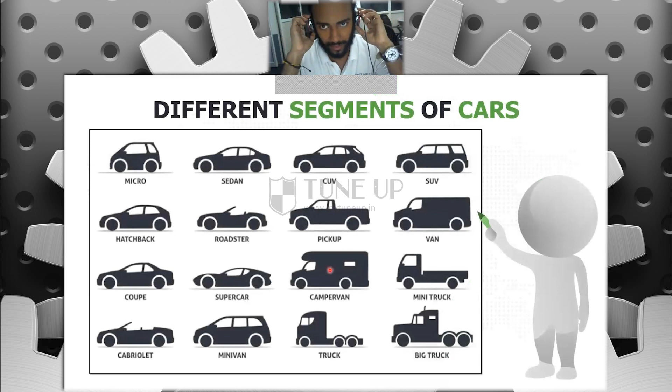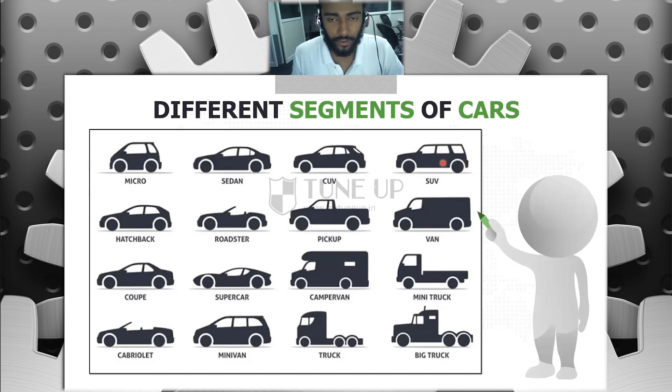Now let us move on to the next one. Now there are different segments of cars, isn't it? You can have a look at the screen now - we have micro, sedan, CUV, SUV. What is CUV? Can anyone tell? It is crossover utility vehicle - correct, somebody typed Akshay. Basically it's a crossover between your SUV and a hatchback - you can notice the design here, and in some terms it depends on other models, sometimes SUV and coupe also they'll do. It depends, so it's nothing but a crossover. You can notice how it's different here. Now we have roadster, pickup, van - these are the different segments of cars. There's a supercar, a coupe, a camper van, mini truck, minivan, cabriolet, then truck, big truck. There are a lot more other segments as well, so this is a general segment of cars. Each particular segment would depend on the requirement - depending on the customer requirement and what kind of purpose it serves. Got it? Okay let us move on now.

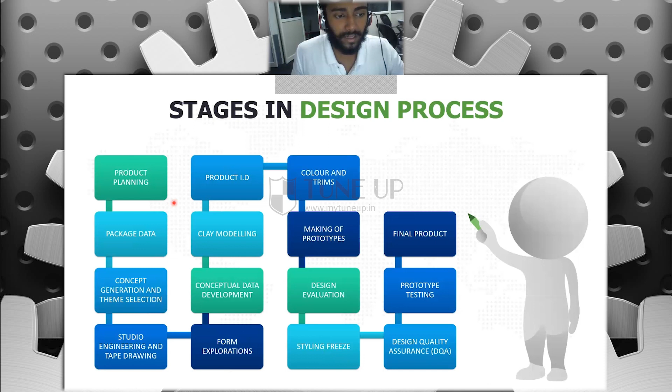Now we have stages in the design process. Let's see the different stages - we could start from product planning, then package data, concept generation and theme selection, studio engineering and tape drawing, then forms exploration, conceptual data - all these things we'll be covering. Today we'll cover half of it, tomorrow we'll go with the rest. Tomorrow I'll also give you a demo about various softwares used in the industry, show you the interfaces and some models, so you get a very good idea about it.

Now what is product planning and brief? This is the specific job of your R&D department, carried out by a multidisciplinary team - not just design engineers. There'll be market analysts, sometimes the CEO, the vendors, the clients, procurement, people from the floor shop - all consulted. There'll be team leaders for each - someone who's team leader of the floor shop, someone who's team leader of the vendors, someone who's team leader of the design engineers. All these people are responsible to establish the parameters and decision points for any product.

If it's a new product, it is called an invention. But usually in the market right now, what is going on is reverse engineering.

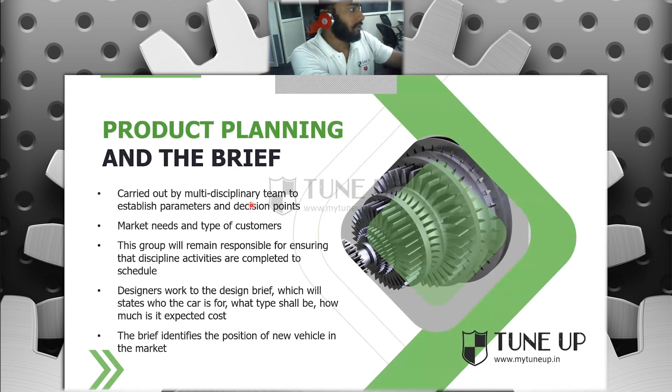So what is reverse engineering? Can someone give me a small definition? It's a very important concept - you can Google it up, I don't mind. The main intention of this workshop is that you should learn something and upskill yourself in your own career. Can someone type? If it's wrong, it's okay.

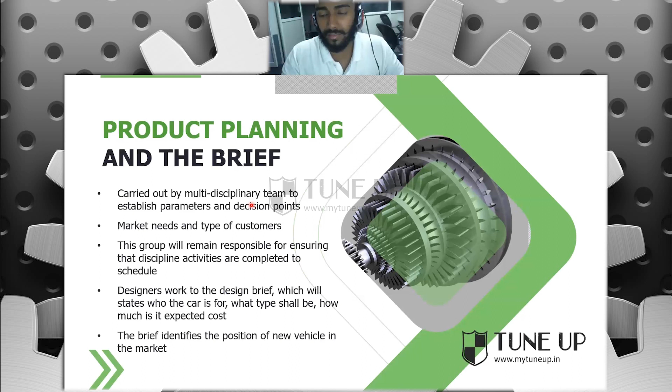Taking the ideal product and rebuilding it from scratch - okay, but why would I rebuild the same product again? Let me give a brief about it. Reverse engineering is when you take a product - let's take a simple mobile phone. There are millions of different types of mobile phones, but the purpose ultimately is the same - calling, internet, apps, and other computing functions. The main purpose is the same, but why are there so many of them? That is what you take in reverse engineering. You might have seen some Chinese brands copy the functions from some US brands, or some Indian brands also copy. So it's like everything is reverse engineering - in the market right now, inventions are very less.

So if some brand or company invents a new technology, everybody else starts copying it. What you do is take a product, break it apart, take its components, and change it a little bit so that you're not called a copycat. That's all, but ultimately you are. Either you come up with a new invention from that, or you improvise it. It's a topic people don't want to be blamed for.

Some companies say, no, I've not copied. Sometimes there are wars between Apple and Xiaomi, or between Indian brands and foreign brands like Samsung and Apple. They'll say we have patented it, but still you have copied that. So all these things happen in the industry, and these are all huge corporations I'm talking about.

But on a local level, you know what China products are, right? So it actually means the R&D process. Yeah, it comes under R&D - reverse engineering. It's a very important term in R&D.

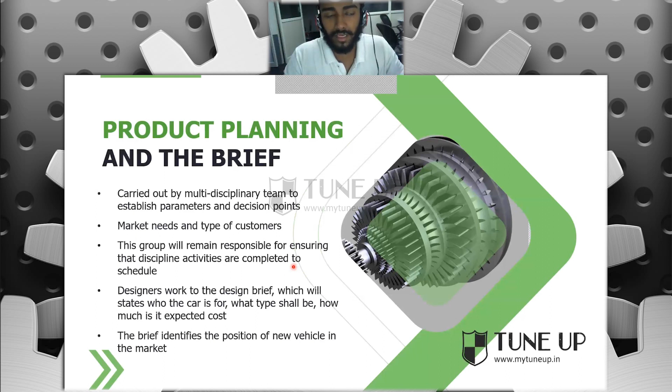If I'm making this car for people who are into sports, the design would change. If I'm making it for families, it would change. If I'm making it for luxury, it would change. If I'm making it for a limousine, for parties and celebrities, it would change depending on that. So I would make the design based on market research, customer need, and all these factors. That comes in the first step.

Next we have package data. What happens in package data is it's a balance between product design, engineering, and manufacturing alternatives. This is where I decide what particular concept, engineering, or mathematics I'm going to use later on. Now there is also something called benchmarking.

What is benchmarking? It's about setting a standard. Benchmarking is available within the same company, and it's also available between competitors.

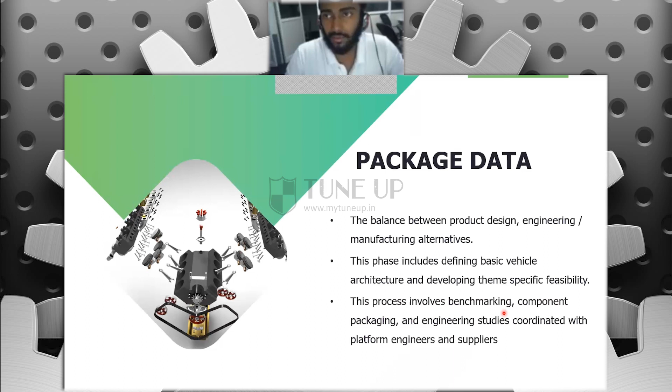Let's say Kia Motors launches a new car into the market - that becomes a standard. Now what Maruti Suzuki or Tata would do is keep that as a standard, and they try to build something even better than that. So that is what benchmarking means.

Benchmarking is about setting standards between competitions as well as with your own products. Let's say Tata Motors has a latest car. For the next time, they're going to try to build it even better. So that is what benchmarking means. It could be within your own company and with the competition as well.

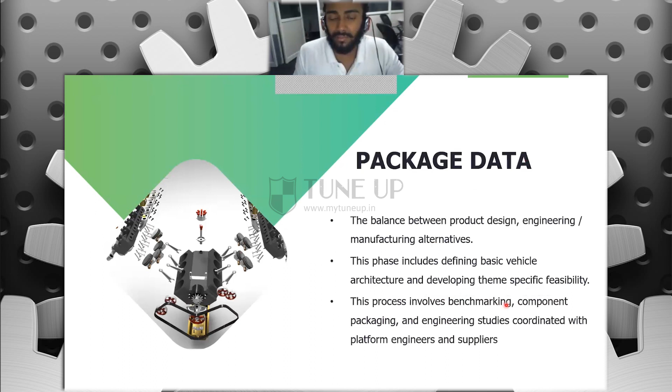Got it? So all these concepts are covered in the package data, also architecture and developing theme specific feasibility. Theme in the sense the colors, the contrast, what kind of texture it has, all those stuff. Next, let me take a break.

Can you guys tell me, are you following with whatever I'm telling? Any issues you're facing? Any issues with my pace? Any issues with my accent? Anything? Okay, good. So again, I would repeat it. If it's interesting, please type 'int', so that I get good feedback from you guys. Or else if it's not interesting, I would try to make it more interesting. Type in int. Yeah, good, okay then, fine.

Okay, let me try to get... is it breaking? My voice is breaking. Okay, now is it audible? Okay, fine, I think it's better now. Okay, let me just.

Okay, fine then. So what do you guys aspire to become? You want to go into which sector? Can you let me know? Let me see what you guys want to become. You want to become good automotive, you want to go into automotive, aerospace? Type it, let's see, so that I get a good idea. Everybody is interested in going into automotive, automotive industrial design. Let us see your opinions and your dreams. Automotive, everybody is interested in automotive. Good, good, so all are automotive enthusiasts. Yeah, yeah, oh very good. Design engineer, okay, design engineer, it could be in any field. You go for electrical, you can go for any field, it's not limited to auto. Some are interested in automation also. Very good, that's a very good field. Automation, good, okay then, fine.

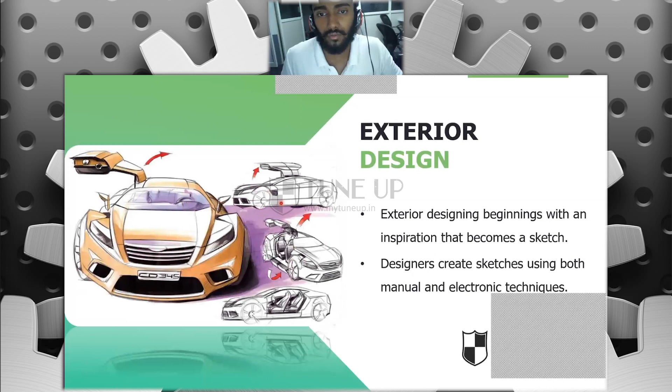Clear? All right, next. Now for exterior design, what are the different things? Now you can see this is somewhat like a cyber truck, isn't it? It somewhat resembles that. See, if I'd gone with this particular model, let's say in my industry I have one designer or one stylist who has created this, another has created this. Now tell me, whom would you go with - number one or number two? Type it in the comment box. Let's see, you would go with one or two?

Okay, now that you're told two, why would you go with two? Can you tell me why would you go with two? What is the reason? Yeah, what is the reason? Aerodynamics, market needs, stylish - then what else?

Okay, you tell me now, the appearance of a car is important or not? Yes or no? The appearance of a car, yeah, important, correct. Because that is the first thing you'll notice, right? See, if you go for a showroom, immediately you get connected with the car looking at the appearance, first of all, isn't it? No matter how powerful the engine is or no matter how good the mileage is, at the first instance, the first impression that a car makes is from its appearance, correct? So then comes your aerodynamic and everything.

This comes from the designer's point of view. But from a customer's point of view, at the first instance, it would be appearance - the colors, the textures, the types of wheels, the trims, interior trims, exterior trims, the interiors, the kind of leather it's used, the kind of engine it has. That all comes later on, the technical terms. So it depends - initially it would be the appearance, then you'd go with its horsepower or whatever, its output, its mileage, and its lifelong term, and all those things would be coming later on. So appearance plays a very, very important role in order for a car to be appealing to the people, to the customers.

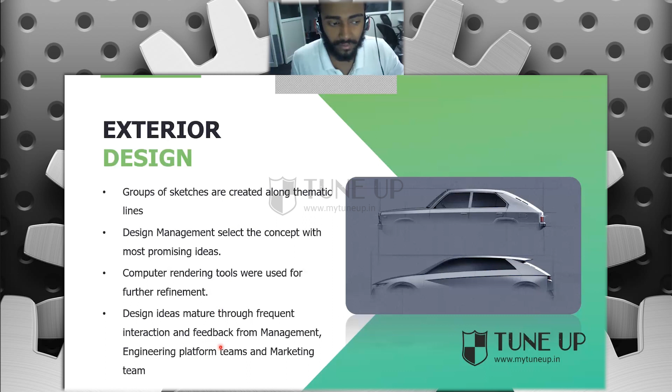Got it? Now, as I told you, group of sketches, and we have design management. We'll be using rendering tools, then design ideas from the feedback from the management and the marketing team. Everything I'll be considering, then I'll be creating the model.

Next, we have studio engineering and tape design. Now, what is this? Here is where I start with the softwares, after the design, everything is finalized, the basic design, then I'll be going with the softwares.

Now, here I'll be starting from the 2D lines only, I'll be creating the surface design, into 3D I'll be going. Now there'll be different softwares, CATIA, NXCAD, these are very much used for surface design. So if you're very much interested into car surfacing and stuff, you should learn CATIA and NXCAD.

So these are very advanced softwares that are used in MNCs, used in automobile industry, aerospace industry. Companies like BMW, Mercedes, Rolls Royce, they'll be using such advanced softwares.

Next, we'll go with form exploration. Now what are form explorations? Form explorations is with respect to the design of it. As I told you, from the 2D sketch, I'll be converting it into class A surface. These are the form explorations that I'll be doing. You can see development of mathematical curves which are evaluated for smoothness and continuity, as I told you, G1 continuity, G2, G3, all those comes here. So I have to make sure the surface is as smooth as possible.

There shouldn't be even a small bump on it. So even in the testing phase, if I found some, even a small degree of bump, I'm going to reject it immediately. So that's how important your class A surface is in the designing environment. Got it? Okay, so we'll go with the next one.

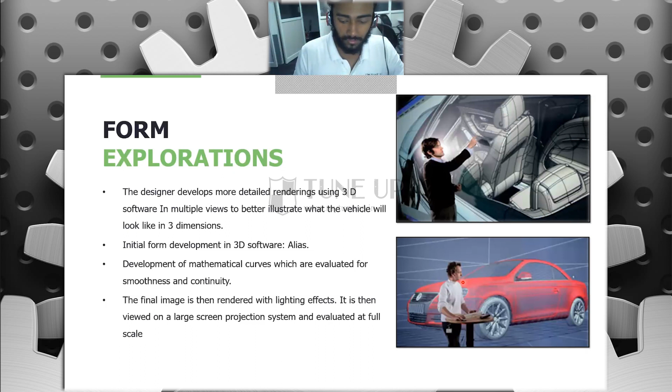Now what happens is, this data first I'll make sure that these data are ready. After that I consider, from all the various teams. See, there'll be teams for wheels, there'll be teams for the mirrors, there'll be teams for the doors. So there are separate teams for each of them.

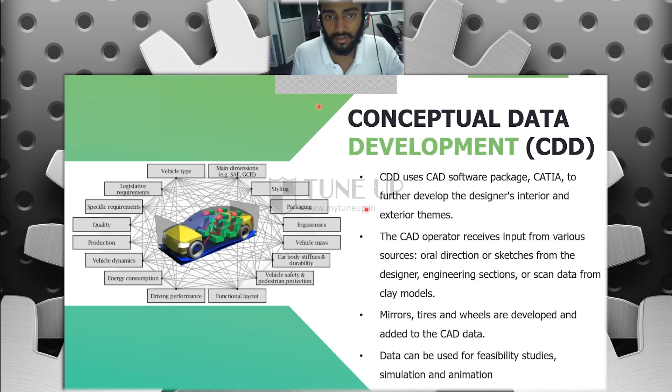As I told you earlier, there'll be BIW, there'll be interior teams and exterior teams. Even within that, you'll be responsible. Some two people will be responsible for the door, some people would be responsible for the knobs, some people would be responsible for the gearbox. It's not that they're going to give you an entire car to develop, that never happens. So it is segregated, categorized between people, between different professionals. Got it? So all this data is first managed and then we started.

Next we go for clay modeling. So after all this design has been set, each product has been done, everything has been assembled, we go for clay modeling. In India, as per Indian brands, we have Tata that has such a technology. Other brands from other countries that have their plants here in India also have such technology. This is the process that transforms the 3D model into the actual clay model.

As I told you, we have to first create a prototype, but before the prototype, there is something called a clay model. Sometimes it's a smaller model, sometimes it's the actual size, depending on the professional using it. Sometimes first they'll go with a smaller model, then with the actual size. Sometimes the sizes range one fifth of the actual, or sometimes it's created at actual size, so they get the data from the actual car model before even manufacturing it.

There's something called Di-Noc film that is applied all over the clay model for better light reflection, so it gives that real car look, as if you created the actual model. You can have a look at its design and various considerations, various colors, textures, types of wheels, bonnet, trims, and arrangements of different models. That is why we do clay modeling first, so that if there's any error or fault, I can rectify it later, without spending so much raw material, energy and expenses.

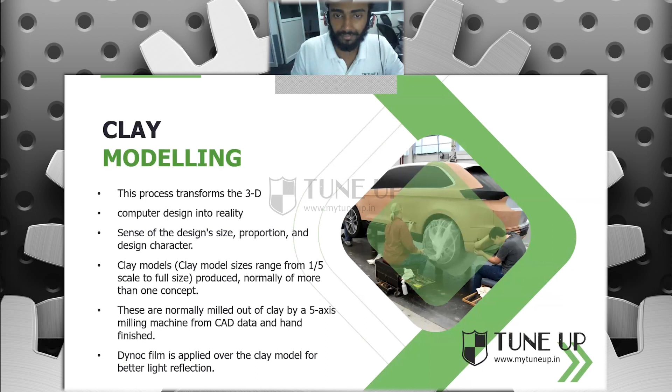Next is something called product ID. Now what is product ID?

So now what are these? These are the unique brand logos, or brand icons or IDs you can call them, representing a particular brand. Even to give a specific logo or a specific brand image, there is a specific team for that. It's not just something I'll design and put as my car brand. No, even for this small logo design there are multiple teams that will consider the company culture, the country they have, all those things, and try to make it as unique as possible. That is known as product ID, or product identity studio, as it's also called.

Next we'll see colors and trims. The Color and Trim Studio is responsible for the research, design, and development of all interior and exterior colors. In industry, you may know a few colors, let's say a maximum of 15 or 20. But in industry, there are thousands, tens of thousands of colors.

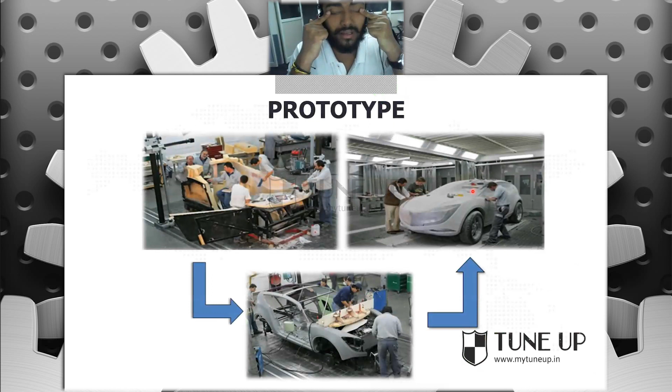Next we have the prototype. After everything has been given - all the colors and everything - we create the prototype. Now we can see there are wooden prototypes, clay models, carbon fibers also. These are cheaper levels of carbon fiber, not the actual ones.

It depends on each industry, it depends on people. They'll be starting from scratch, then assembling all the various components, getting it here. So these are the various images we have taken, so that you get to know the different types of prototypes and the different types of modeling used to create that.

So these are made, as I told you earlier, so that before manufacturing I get to know all the various aspects of it - can it withstand the particular load, so that I don't face any failure later on. When I'm creating crores of batches, I don't face any failures or errors, because I did it in the prototype.

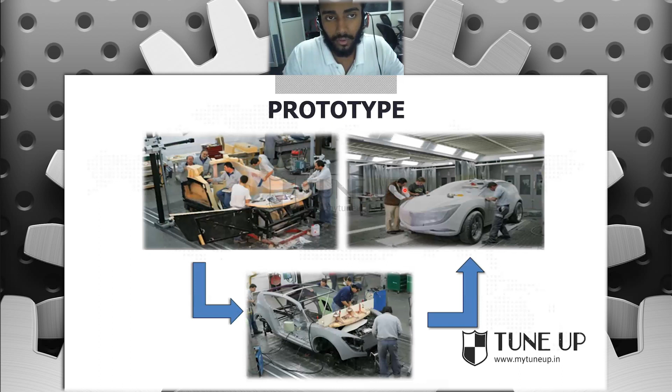Have you heard of AR? What is AR? Type in the full form. Nobody knows - augmented reality, yeah correct. It is augmented reality.

Now what we do in augmented reality is we combine real life technology with a virtual thing. I can analyze how these surfaces react to various loads, and if there are any abnormalities on the surface, any deformations - all those things I can see in augmented reality, in virtual conditions. So that is what augmented reality means - it's an interaction between technology and real life. That is how advanced technologies have improved now.

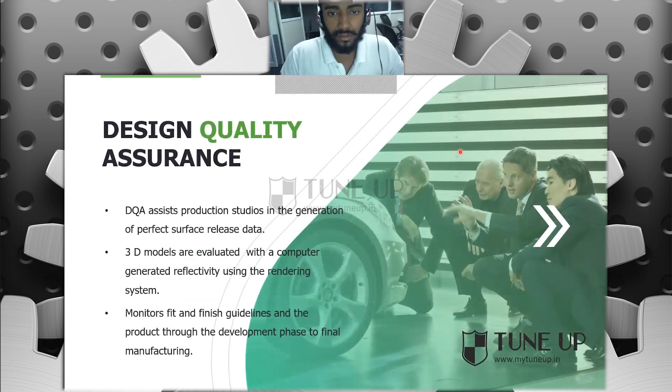Next we have design quality assurance. So after the freezing, I'm going to start with the testing of the quality, like how my design is. We'll be using analysis softwares like Hypermesh and ANSYS. In analysis there is something called pre-processing, solver, and post-processing.

Can someone tell me, pre-processing, solver, and post-processing, under which concept does it come? You might have studied that in engineering. In pre-processing we do meshing and geometry - have you heard of discretization? And engineering data and all. In post-processing we get the result.

In pre-processing, obviously it would include all the initial stages - analyzing it, meshing, discretization. Have you heard of finite element methods? Finite element methods is the whole sector of that domain, under that we have all those things. There is something called FEA also. The solver will be solving with various mathematical equations and data. Post-processing will be generating reports and the results from that. If you've heard of Hypermesh, that is purely a pre-processing software, but ANSYS is pre-processing, solver, as well as post-processing - it has all three. Just a small interesting fact for you guys.

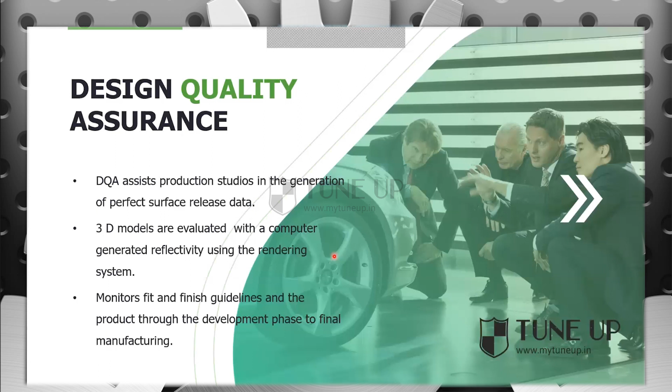Now we have prototype testing. You might have heard of crash tests. What are crash tests? Tell me, this is very easy. What do we do in crash test? Testing the sustainability of the product. Correct, anything else? Safety testing.

Safety of passengers, very good. Model scan, stability of the product - good, good, good. So it would involve everything, it is not just about the car, it would be about the passengers sitting inside as well. So it would take all kinds of testing - front collision, from the side, from the top. They're going to test various factors, lots of things.

Okay, so your design evaluation would be done using prototype testing. As I told you, before manufacturing I'm going to do all of these things, because after manufacturing, all of my money, energy, equipment, and raw materials have already been given, isn't it? So that is why I make sure my prototype is ready for everything before going for manufacturing. So all these things would be analyzed and tested here in real life.

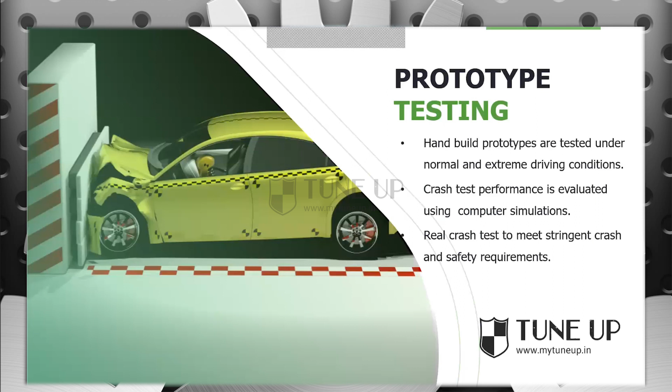Okay, so there are various standards for crash testing also in India, also in Europe, also international standards, various standards we have. So you can Google up for any car you take and check the star ratings. Each particular standard would give you a certain amount of stars. So based on that you can decide when you're looking to buy a new car.

Some countries, like suppose in India, the ease with which you can travel using a luxurious sports car is very low. You know about the potholes and the huge humps that we have. You might have seen some funny videos where a Lamborghini gets stuck, or a Rolls Royce gets stuck, all that stuff. So it depends on each country, their terrain, and their regulatory norms. Then we have corporate strategy, brand image, customer demands. So these are the factors that influence automotive design.